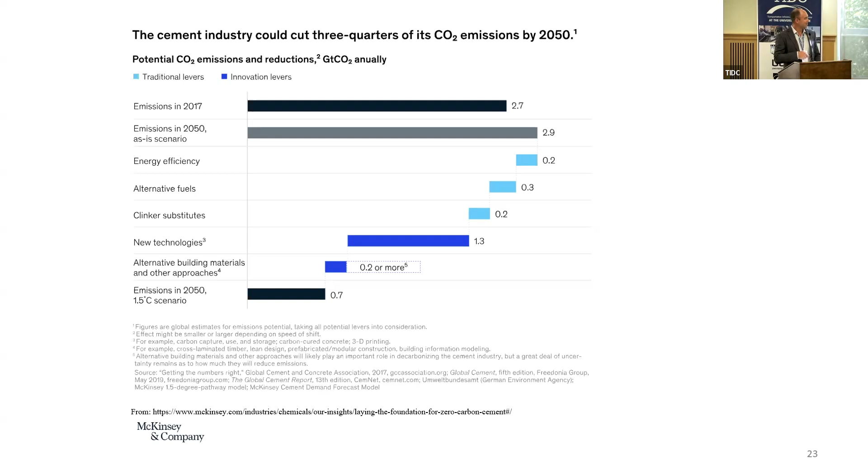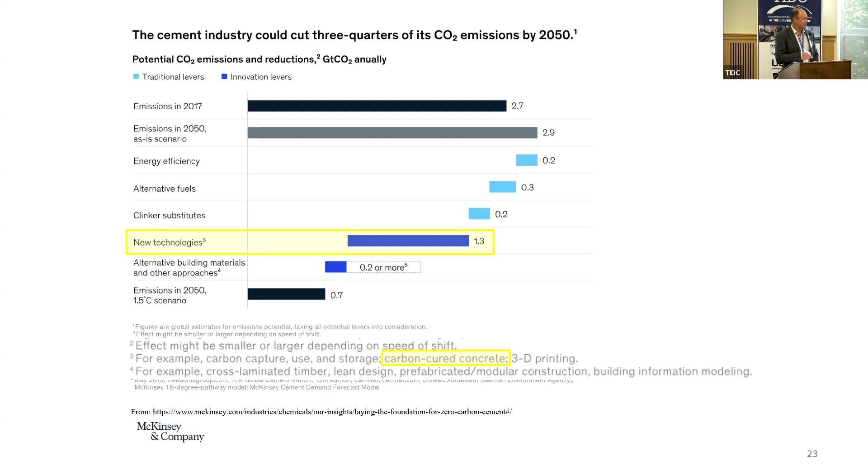And folks are talking about different ways, increasing energy efficiency with the kilns, alternative fuels, clinker substitutes, and others. But really the big one here that you see, 2/3 of that reduction is relying on new technologies. In particular, one of the promising ones is mineral carbonation, or sometimes you'll hear this called carbon cured concrete. Some of you might be familiar with it. That's what I'm going to look at today, except from a soil stabilization perspective. Why would we care about this?

Well, basically the subgrade quality has a substantial impact on the overall design and cost of building a pavement system. Generally speaking, you'll have up here your asphalt. This is what everyone sees. That's what's cracking. That has to be the problem, right? Well, there's a lot more going on. We also have this base, subbase, and often native subgrade material that's contributing to the distress that we see in the pavement. Certainly here in Maine, we see the potholes, we get the freeze and thaw cycles when March, April come around, lots of rain, and then a lot of distress starts to take place.

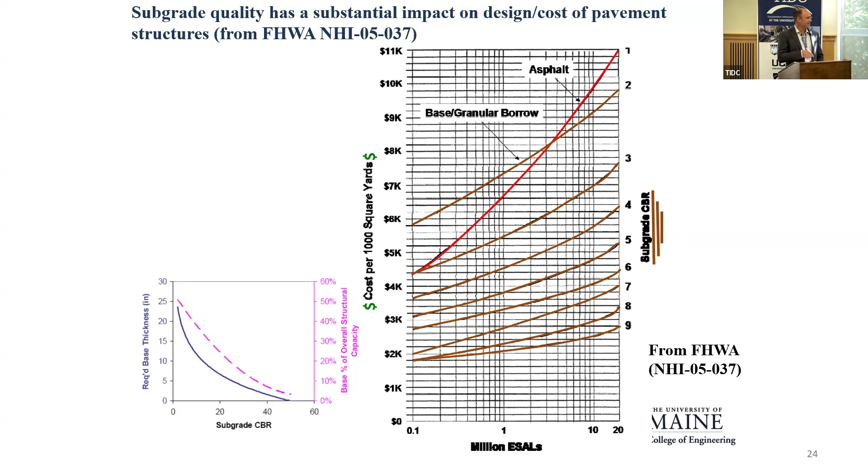And basically, when you have a better subgrade, and I'm using CBR, the California bearing ratio, which is really a proxy for stiffness here, as that increases, these other materials decrease, and so that substantially reduces the cost, and you can also increase the durability of the pavement system. Here's another way to quantify it, subgrade CBR, and across this family of brown curves, the cost is going to go down as that CBR goes up. This is a relatively old figure making some estimates as to how that would contribute to cost, but generally you get the idea.

So there are many ways that we can potentially improve the subgrade or materials that are underlying the pavement, especially when we have problematic materials, which is not always the case. But when it is, we can excavate and replace. We can use geosynthetics. These two tend to be pretty expensive. This works pretty well. This sometimes has some questions. It's not widely used. And then here at the end, we have chemical stabilization.

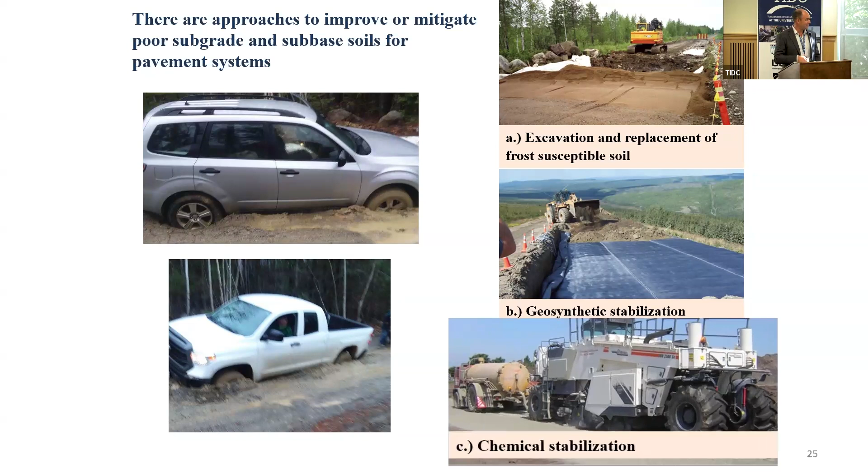And really what we're trying to do here is to prevent, I've shown you some photos here of really what's going on underneath the asphalt. This is a dirt road, but this is something that could be underlying the asphalt in an engineered system. And so we don't want to lose that bearing capacity, right? We want to make sure that that remains stiff. Okay, so how are we going to do this?

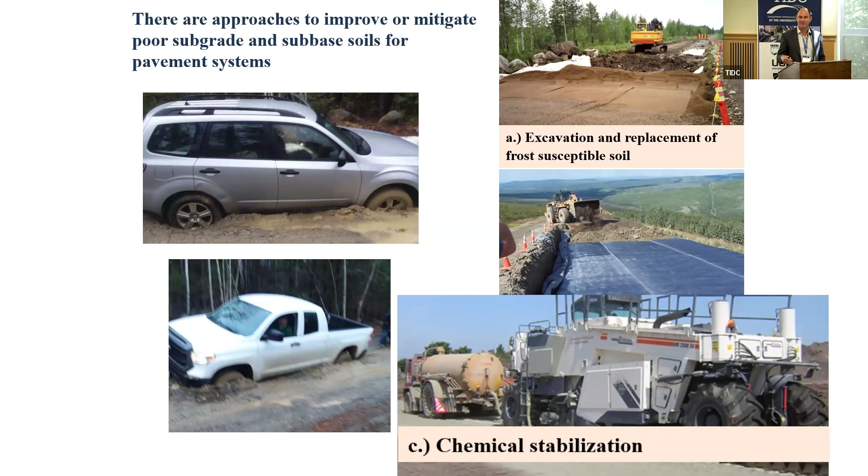We're in this class of what we're calling chemical stabilization, and we're going to do things a little bit differently. Now with chemical stabilization, if I go back here, you'll see you basically have a big rototiller here mixing cement or lime typically into the soil. And what that's going to do, you're going to have a hydration process, and it's going to stiffen up the material. If we think about the process of where that cement comes from, right?

Really, we're thinking about stabilizing weak soils now and putting carbon back in the ground, where it belongs, where it started. Where did it start? It started in a quarry as limestone. That's often calcium carbonate. We come down here, we typically heat it up, and this is usually where the process stops. So we heat it up, we get lime cement production, and we off gas all that CO2 as the calcium carbonate decomposes. And so that's what we call process-based emissions.

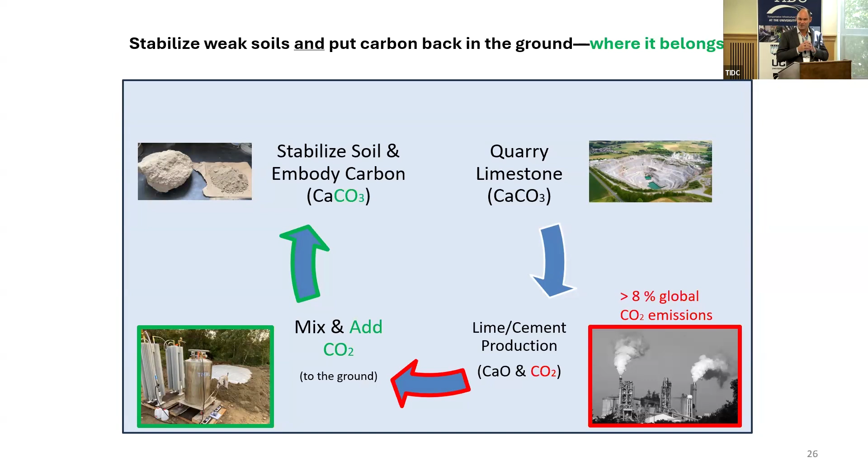And those process-based emissions account for approximately 2/3 of those CO2 emissions that you see from lime or cement production. So it's a substantial amount. So what we want to do is take that CO2, actually mix and add it back into the ground with the lime, and basically come back to calcium carbonate. So we just want to kind of make that entire cycle, and we're going to rely on calcium carbonate to be our binder, instead of hydration products that you would typically get with cement.

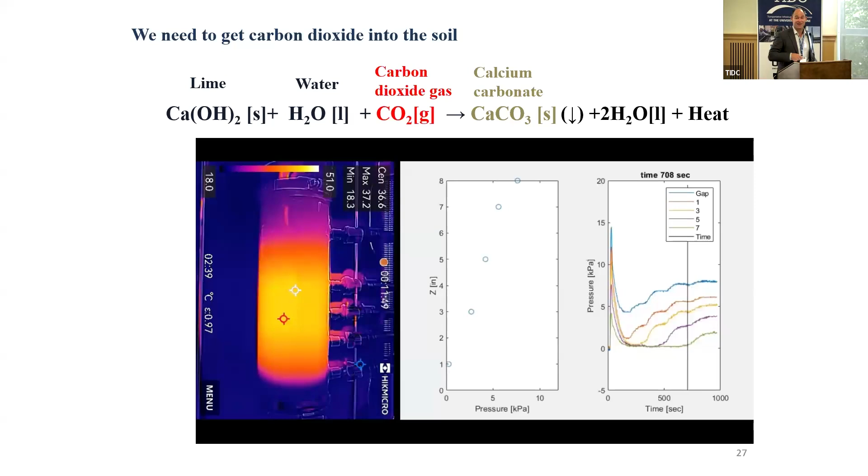So you've got lime, water mixed with soil. We're introducing the carbon dioxide. And what's happening here, where you see things lighting up, calcium carbonate is precipitating, and we're generating heat. So that's kind of a proxy for where the reaction is occurring. This particular experiment, by the way, you can get things going pretty rapidly, but overall it took us 15 minutes to go the depth that's typically improved with chemical stabilization, anywhere from 6 to 12 inches, typically speaking.

One thing that people are going to ask is, does it perform as well as the hydration products? And so with the materials that we've tested, granular materials, fine grain materials, the answer is yes. So I'm not going to go into the details of this figure, but I'm showing unconfined compressive strength and basically this ratio of density, and then also the volumetric binder content to play into the strength that you get. So those are important design parameters. But generally speaking, what I want to show here is that they follow the same trends, and effectively overlap what you'd expect with cement using chemical stabilization.

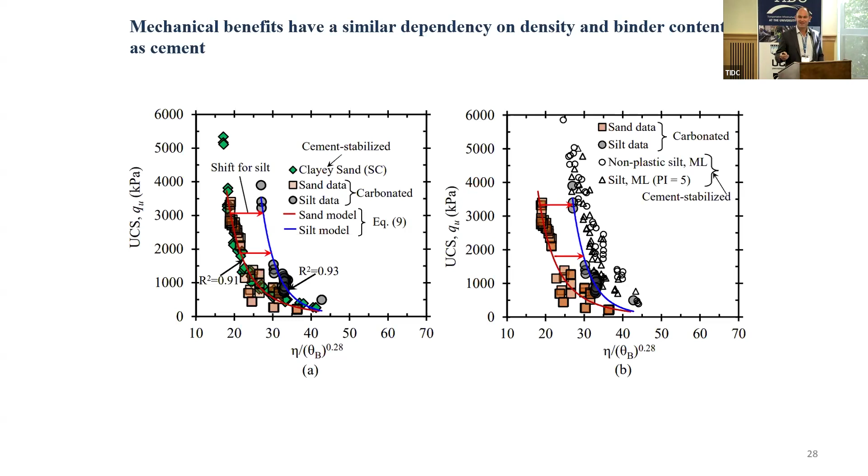So what we did after the lab is we wanted to go in and start thinking about a prototype, something that could potentially be applied over large areas. And so we call this accelerated surface carbonation, where you would expect, let's just say, a seal, introducing carbon dioxide beneath it, trying to enforce vertical penetration and getting that carbonation to occur where we have some lime mixed soil now.

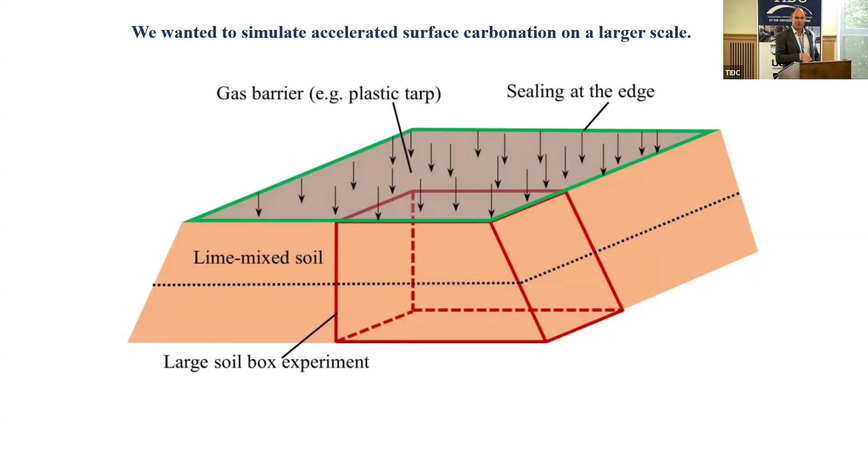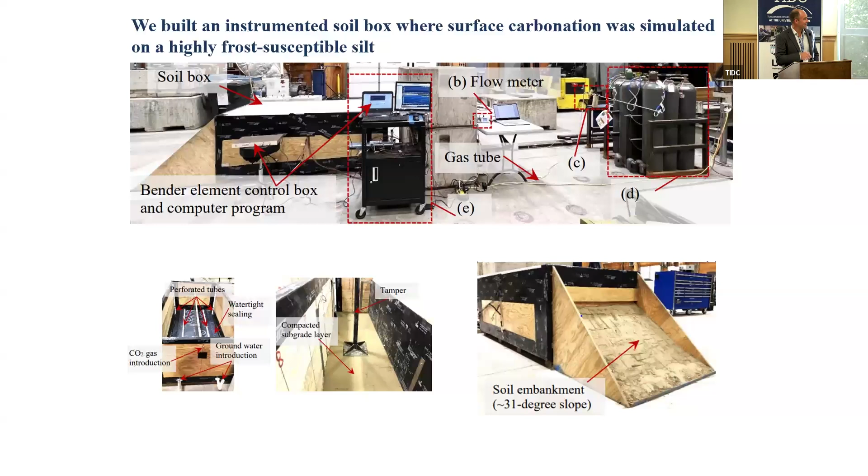Here's kind of an idea of what that looks like. That red is trying to poorly illustrate here a portion of the embankment that we're simulating. And so that's kind of what you're seeing here. This was heavily instrumented. It's intended to be a portion of a roadway embankment, if you will. We see we have a gas reservoir, we're introducing it. We have embedded thermocouples and other instrumentation to look at what's going on.

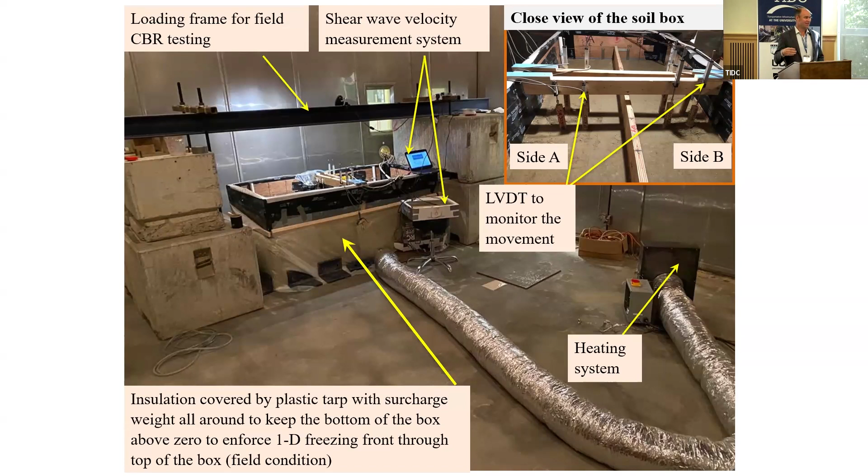We also took it into an environmental chamber, introduced multiple freeze-thaw cycles on a silt, which is a highly frost-susceptible material. So we were kind of interested in how durable it might be as well.

Through the experiments, what you'd see here during the carbonation period, if you will, you see heat. This is basically at the surface. This is 100 millimeters down, 4 inches down. You see this heat start to generate, similar to what I was showing before. So we knew the reaction was ongoing.

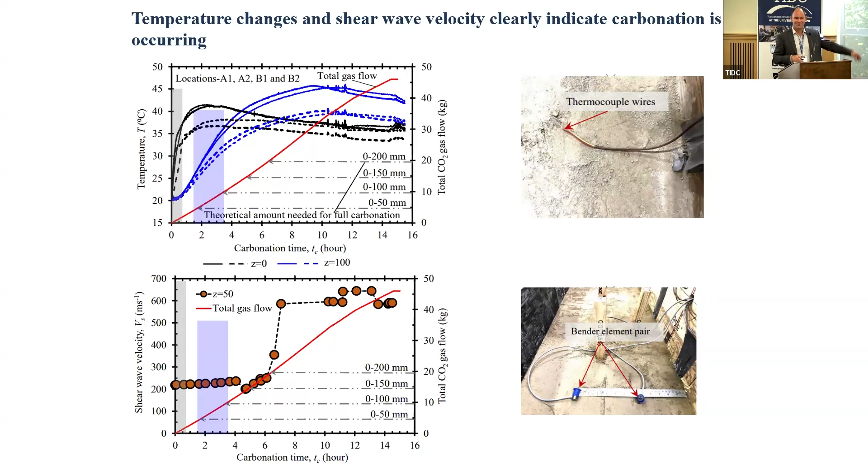But more importantly here, you see the shear wave velocity, basically a geophysical method to give us an idea of how stiff the soil actually is. We go from here to something that's typical of a soil, like you'd expect, and it jumps up here to something that you'd expect to be representative of really soft rock. If you're interested, I brought an example that you can feel if we want a little show and tell, and you can feel that is in fact the case.

All right. If there's some pavement folks in the room, yes, we did carbonate, certainly in the upper portion, all the lime that was there. So we converted all that lime to calcium carbonate. So now we have the carbon basically embodied in the binder, and we get this substantial increase here at the surface of the CBR. And this would be considered basically a very good or excellent subbase.

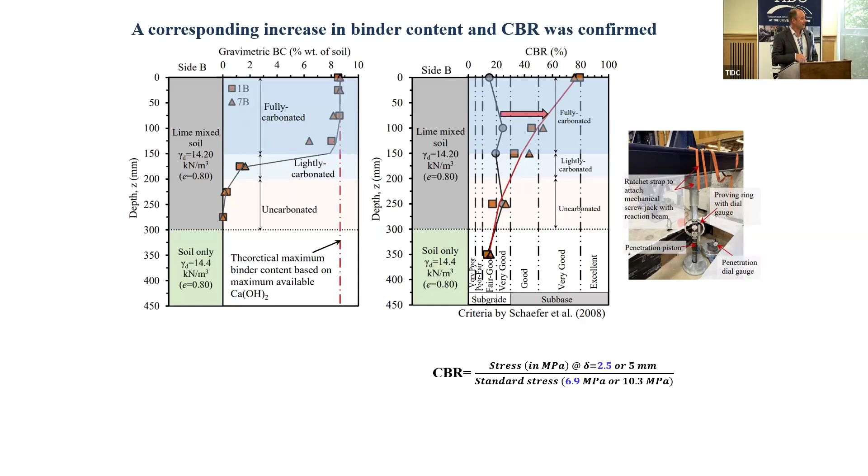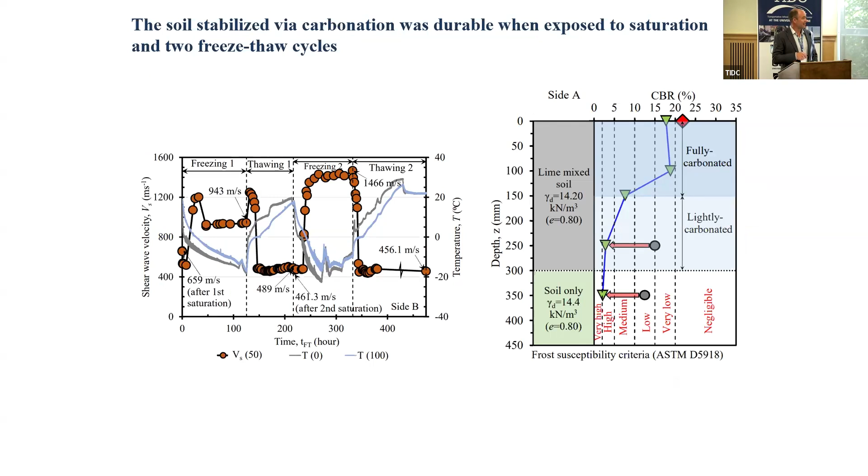Okay. Went through the freeze-thaw cycles. Basically, the shear wave velocity remained high, and through the carbonated zone, we see that the CBR also remained high. That was the red dot beforehand when it was just saturated, when we saturated the box.

So overall, though, there are other things going on in industry. We have carbon-cured concrete. We have something that I'm presenting here today, accelerated carbonation to stabilize soil. And there are reasons to consider using these things today. A lot of folks would potentially see something like this and think, oh, that's great, we should just go ahead and use it. There is an added step. We have to add CO2. That is going to add some cost. We haven't found a silver bullet yet.

And so what you're seeing now is incentives start to come along. So when we think about who might buy, well, we have public agencies. And in large part, this could be FHWA, state DOTs, potentially municipalities. But there's some cost there. And then contractors. Are contractors actually going to use this? They're going to use it if they're told to use it. Right now, there's not necessarily a big incentive to do so.

But what I see as the potential motivators here, when we're talking about public agencies, really now there are financial incentives with the IRA, the Inflation Reduction Act, $2 billion out there to offset costs of using new processes and materials that substantially reduce the carbon footprint, okay? You'll also see state legislatures now in some states actually moving towards a really encouraging policy that would encourage folks to use these types of materials as well. So these are the types of things you start to see happening in the country.

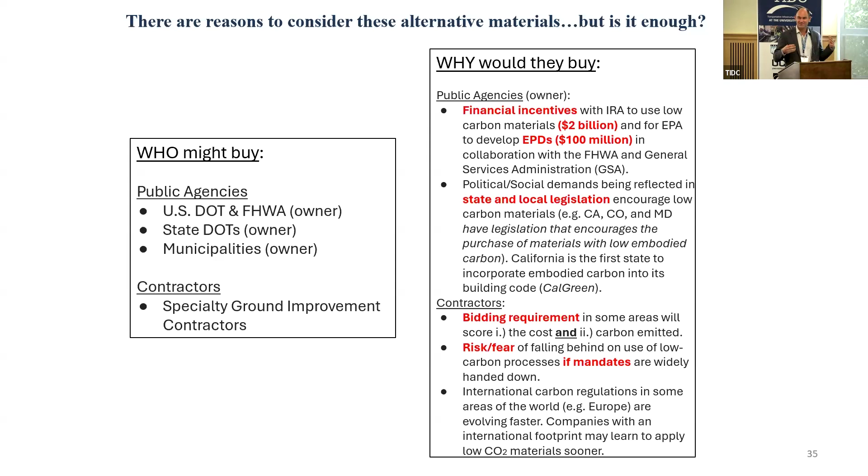So will that ultimately be enough? Folks that are betting on these technologies working and developing them and trying to commercialize them are really betting on that they'll meet that moment where folks are going to be trying to use these in large quantities. And that's kind of my take on it.